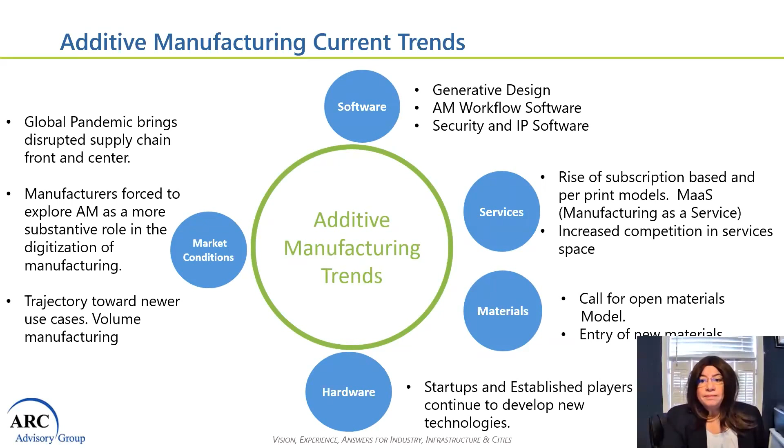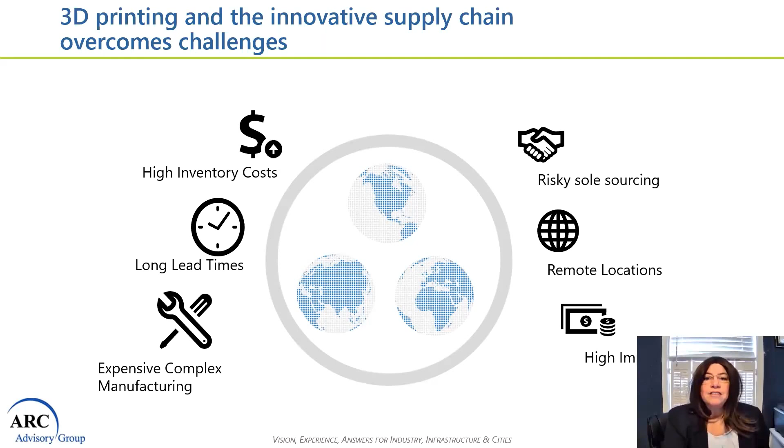Let's take a look at the supply chain. As I mentioned, the pandemic has brought risky supply chains front and center. Supply chains are fragile due to the political turmoil, climate events, pandemics, economic uncertainty. Additive manufacturing mitigates supply chain risk with a design anywhere, produce locally strategy. Additive manufacturing can alleviate expensive, complex manufacturing, shorten lead times, and reduce inventory. Producing locally mitigates the high import-export costs and risky sole sourcing from remote locations. Additive manufacturing can rescue the supply chain.

Software advances are instrumental in the process. Generative design is an iterative process that generates multiple design outputs, meeting predefined constraints and requirements for fit, form, and function. Engineers are using generative design software, such as those provided by PLM solution providers, to design for AM, exploring hundreds, if not thousands, of solutions to be evaluated within a relatively short time frame. This is enabling manufacturers to produce products that could not have been engineered a few decades ago.

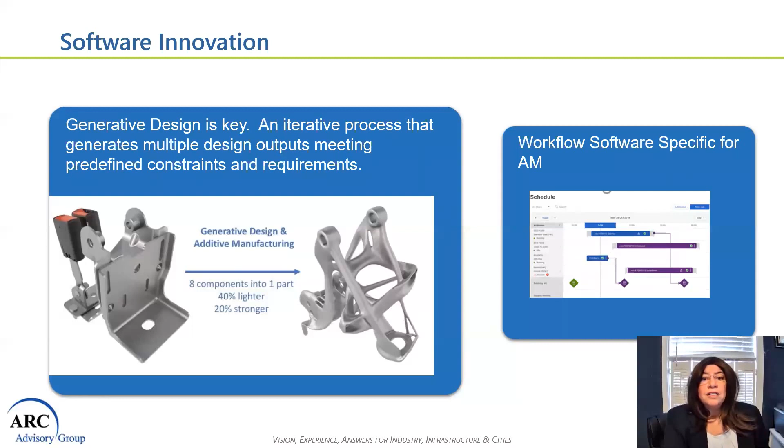An automated workflow software specific for additive manufacturing will become increasingly important as we move to serial production. This will help companies manage increasing volumes and scale additive manufacturing operations, monitoring production costs, material usage, and order turnaround times.

Now let's talk about services and materials. As with other transformative technologies, adopters are balancing short-term investments for capital expenditures versus much-needed innovation in a competitive world. A rise in subscription-based and pay-per-print models is being observed as a result of discretionary spending restrictions and budget limits for capital expenditures. Outsourced production services provide a way to leverage some of the benefits of additive manufacturing, particularly for companies that have put their short-term investments on hold.

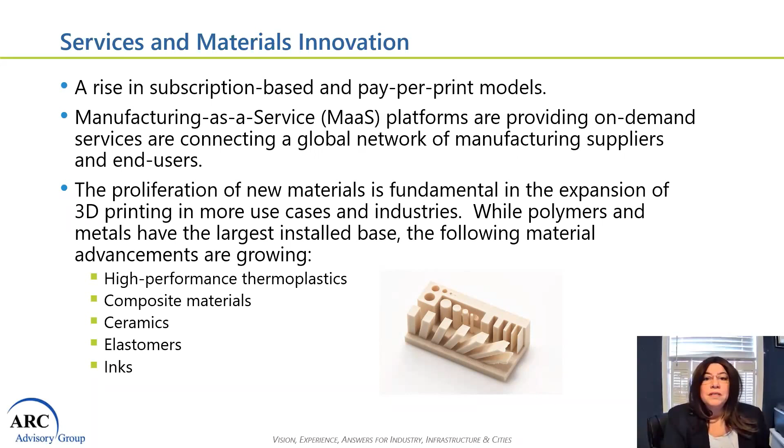Manufacturing as a service platforms provide on-demand manufacturing services connecting a global network of manufacturing suppliers to end users. These platforms offer not only additive manufacturing services, but also traditional manufacturing services. And the proliferation of new materials is fundamental in the expansion of 3D printing in more use cases and industries. While polymers and metals have the largest installed base, the following material advancements are growing: high-performance thermoplastics, composites, ceramics, elastomers, inks. This is resulting in an even more diverse set of products being designed and produced by 3D printing.

Now I'd like to talk about the proliferation of use cases beyond prototyping. Use cases are defined by the value they create, including new products, operational efficiencies, and enhanced customer services. Additive manufacturing use cases beyond prototyping include but are not limited to parts for new products, parts for aftermarket, such as out in the field when parts fail, jigs, fixtures, molds, and tools to be used on the manufacturing line, and also apparel.

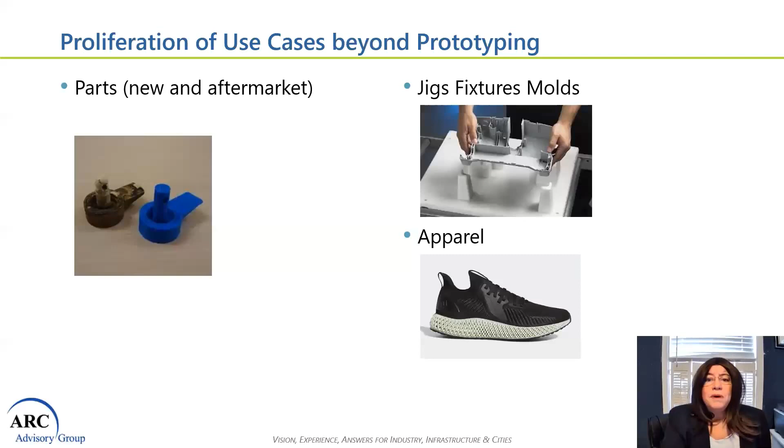Additionally, medical devices and models are not new. 3D printed prosthetics, hearing aids, splints are applications that have been around for a while in additive manufacturing. But implants that are appearing inside the body are becoming more prevalent. This is thanks to the materials science and our discussion earlier about generative design. And 3D printing is part of digital dentistry, including orthodontics, implants, crowns, dentures, to name a few.

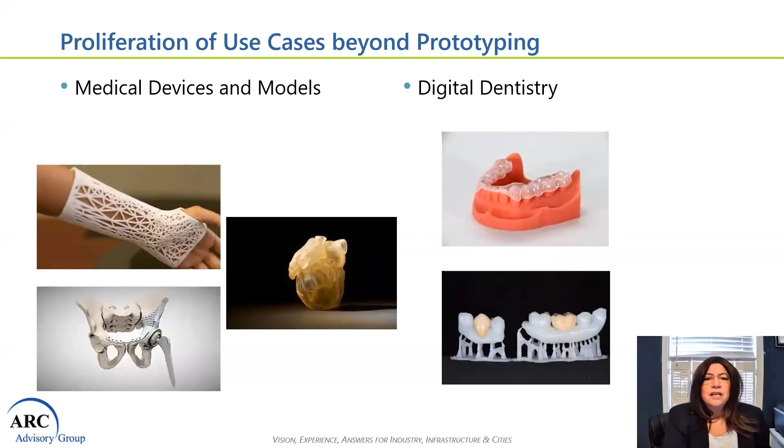I'd like to wrap up with some of the growth contributors and inhibitors, some of which we've already covered. On the contributors side, companies engaged in digital transformation and the smart factory adopt technologies such as 3D printing, leading to reinvention of products from design through manufacturing as part of an end-to-end solution. The rise of new technologies and suppliers have furthered the capabilities of 3D printing, including increased speed and build size.

On the inhibitors side, we still have a long way to go, all of us, in educating the marketplace to reverse the obsolete opinions. Not all companies are as forward-looking as the ones that understand that additive manufacturing is more than just prototyping. It can reduce time from idea to production, can result in cost reductions, and can be environmentally friendly. Many decision makers have decades-old mindsets about 3D printing, thinking it is still an expensive, slow tool simply for prototyping. And the standards discussion has been around for a long time.

Lack of comprehensive standards brings an additional risk to companies adopting 3D printing manufacturing, especially safety-critical applications, and those that are heavily regulated. True industrialization would benefit from process, materials and post-production standards. And this ties in with quality assurance. Even though the quality of 3D printing is steadily improving, there are still advances to be made in part-to-part variation and material chemistry. And finally, we don't just live in uncertain times, but we are living through unprecedented times.

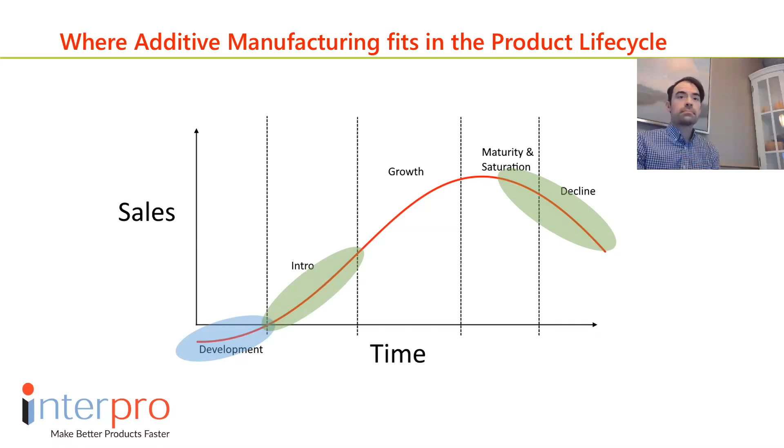One of the things I think about is I had a relative who used to work at Pratt & Whitney, the aircraft and engine manufacturer, in the 50s. He had a Bridgeport in front of him and a manual lathe behind him, and he would make a part complete, but he would make the same part again and again.

Nowadays, a lot of modern day machine shops, you may have 3 to 4 machines to one person, one machine operator.

I think the market has become so much more complex, partly because we have more data to get feedback from clients and to see what they actually want. There's no one coffee maker that is the coffee maker. There's coffee makers for people that really like coffee and the artisanal experience, and then there's a generic percolator. There's all these different products that kind of address different consumers.

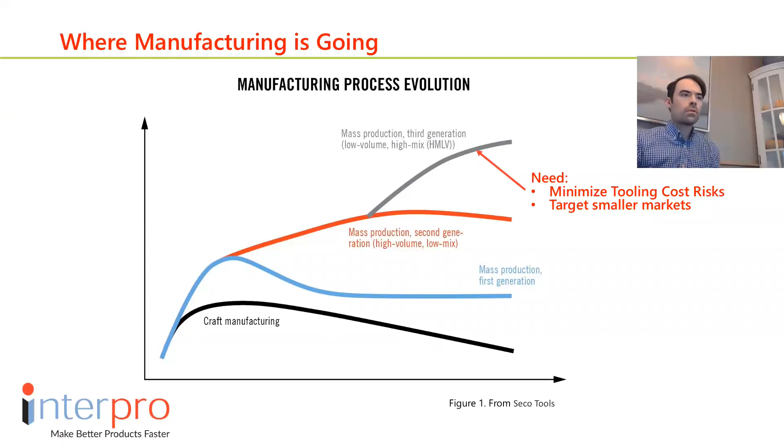But with new machines and materials for the Origin One printer, you really see a different conversation starting to happen, at least I'm able to have them.

So whereas, yeah, it'll be expensive for like one part due to some of the setup time and calculations that we do, the exciting thing is where a lot of 3D printing parts, I think, would start to get too expensive once you get up to the 50, 100. We're able to sell parts almost at, not quite injection mold prices, but getting close, when we're getting up to the thousands, which I haven't had the ability to do in the past without losing money or artificially reducing my margins.

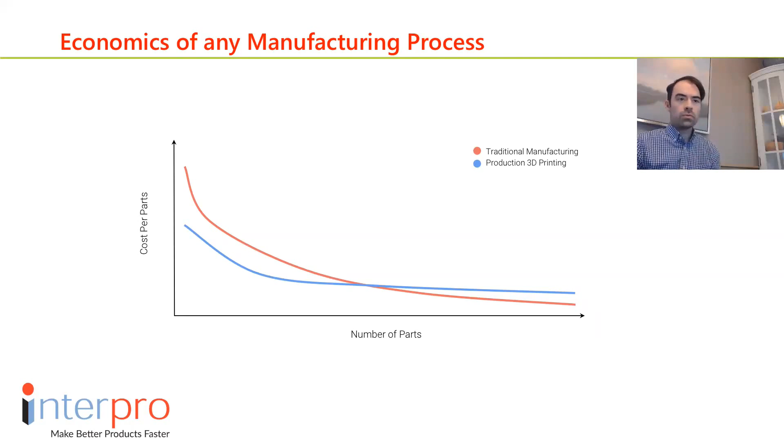The Origin printer naturally can produce parts very fast, whether it's one part or 50 on the build. The build time ends up being the same. So it's a pretty powerful tool from that perspective. And for a couple other reasons in terms of quality and material properties, which I'll get into, it's very helpful.

Now that I've talked about the product life cycle and some of the economy of scale we see with 3D printing, I want to talk about the process and the printer specifically and why that adds a lot of value to that conversation. I think additive manufacturing for production parts has been around for years.

A lot of people have been talking about it, and I definitely agree it does exist. I think printers and the ecosystem that the Origin represents will allow more products to exist in that conversation. Maybe in another year or so, I think we'll be doing products that are only ever 3D printed off this printer, which is very exciting.

From an ecosystem standpoint, the materials really enable us to do quite a lot more than we have traditionally. For example, the Loctite Henkel materials come in elastomers, silicone elastomers, high impact, high flex parts, different colors, but also we just started running the FST material, which is rated by Airbus for aerospace applications and burn ratings. So that's very exciting. As a service bureau, every new material is basically a new problem that we can solve for someone.

The first application I want to talk about is this Distek motor mount adapter. I like talking about it because it's one of the first ones we did, and I still think it's one of the best, because it encompassed the vision I had for the Origin system and what it was capable of doing.

The situation was that Distek had a motor mount adapter. They sell this BIOne mixing unit, and it's got a motor that gets mounted to the top and spins everything. What they were finding was that their clients often had their own motors, so they didn't want to purchase Distek's motors. They didn't want this high ticket item, their core product, the sales to be impacted or impeded by this issue with clients wanting to use their own. So they came up with this adapter, which allowed people to use their motor or any other motor.

As you can see, the way this component was designed, you wouldn't be able to manufacture that traditionally, not very easily. You wouldn't be able to machine that. You certainly wouldn't injection mold it. Even a hand process like cast urethane would probably struggle to produce as nice of a part.

For this part, the Origin did extremely well. We built it in the Loctite 3843 material, which is a matte black, and you can see from the surfaces it's a nice, appealing, customer-facing part. It looks production ready.

The way Distek benefited from that, and as well as their clients, is that they were able to print the SKU for their core part as they needed them—almost like that digital warehousing experience. So they wouldn't have a lot of stuff on the shelf, but they could also have a lot of different SKU numbers for all the other motors out there. As clients would come in and say they had their motors, we would just 3D print them as needed. I think it's a great story because it was a business facilitator—it wasn't necessarily about driving price point down, but it decreased risk because they were able to address client concerns in real time and not impede their core product sales.

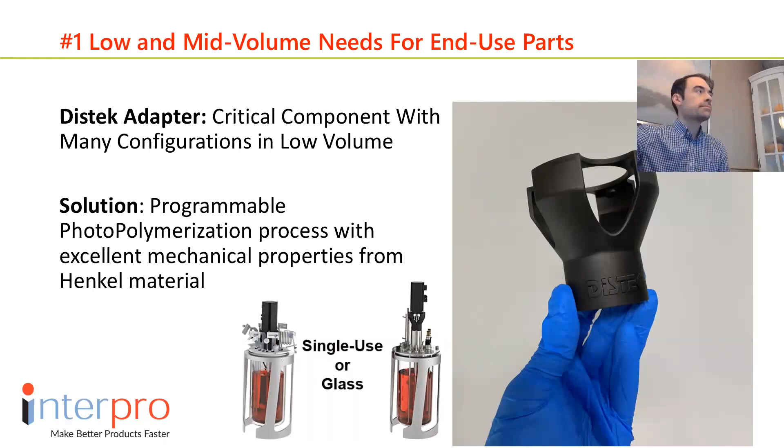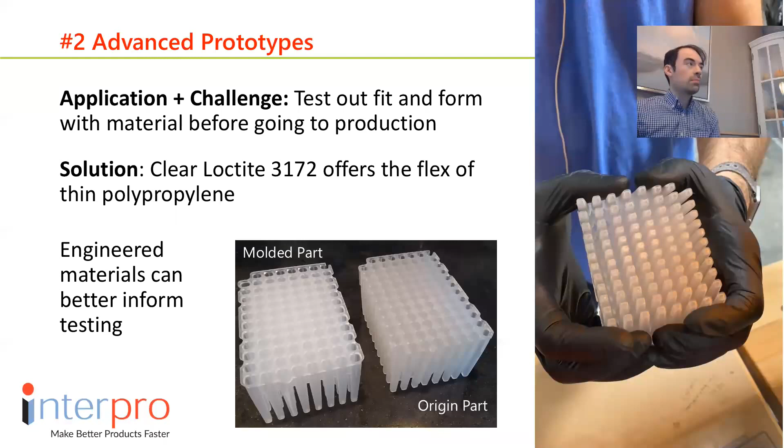You can definitely CNC it—there are some compromises with radii you'd have to make—but for the count they were looking for, maybe 200 to 300, it really worked out well. It's fairly expensive, and to machine that part out of an HDPE or PolyPro is again not ideal. You could injection mold it if you cored some parts out, but a tool cost of $5,000, maybe $8,000, is just way too expensive for the part price they needed.

So printing on the Origin worked out really well. We're able to print 18 parts every 2 hours, and that process is really fast. It's all about how many more parts we can stick on that tray—the better the per-part price is, because it's 2 hours whether it's one part or 18. So the only additional costs are really the processing and material considerations.

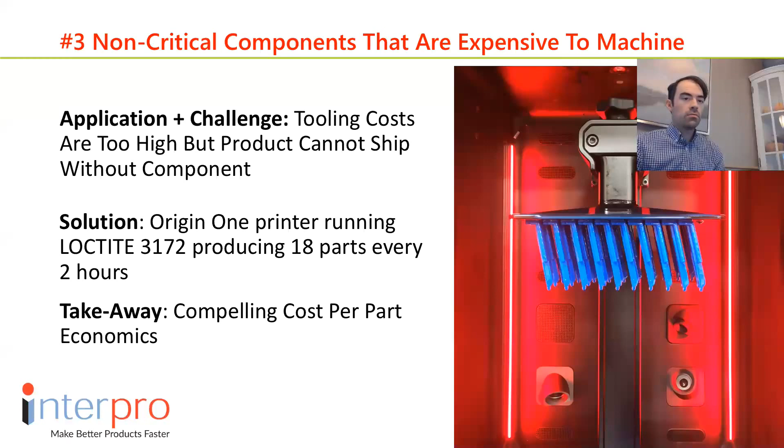Okay, that's the last application. So looking forward, the future is still bespoke, and it's an exciting time. It's not going to be one-off Italian suits, but I do see these kind of niche markets appearing and being addressed, with companies taking advantage of new tool sets like additive manufacturing. We're seeing a lot of just-in-time manufacturing, like with the ventilators.

We're seeing better materials out of Loctite, these engineered materials that act more like traditional commodity plastics. The Origin One allows for faster print time, which reduces risk by dropping the cost per part. It's been fulfilling for me that in 2021, the leap that I took and InterPRO took to offer these production parts off these printers did work out. The best vote of confidence was clients just sending a PO to reorder more. That means we're on the right track, and it's not a pipe dream, which is very exciting. It's nice because I believe we're actually fulfilling a need, and it's no longer just a dream.

So production 3D printing is here and offers a competitive advantage to our clients over traditional methods. Anyway, my name is Dan Straka from InterPRO, and thanks for watching this.

Thank you, Dan. Yes, you are on the right track. What I really liked about your presentation was looking at the manufacturing process evolution and the intersection of hardware and materials, and then bringing it into the application. So I thank you for that.

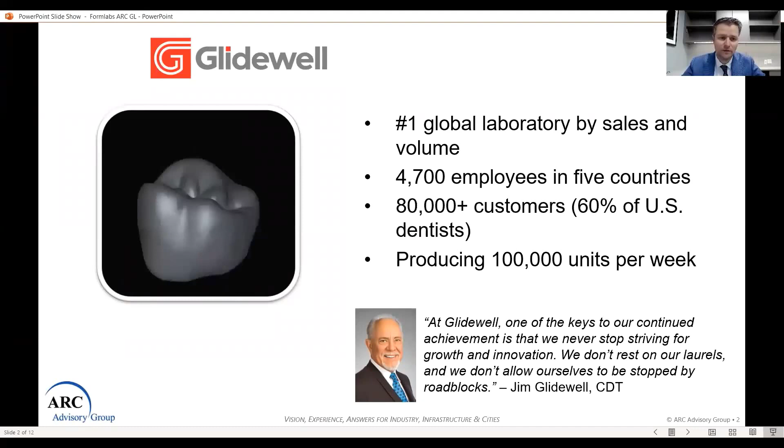We also produce 100,000 units per week, and every one of those is a patient-specific product, which represents an enormous array of natural variation. We've been using additive manufacturing for many years to deliver on those patient-specific demands. To give you more context, we consume 15 metric tons of resin per year, or in anyone's terms, an awful lot of teeth.

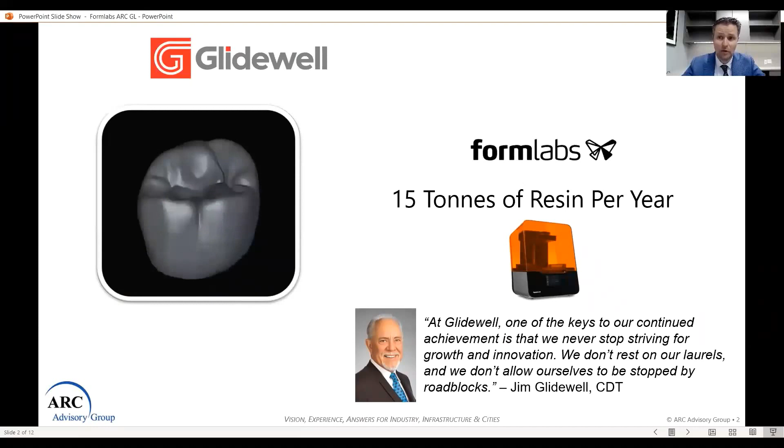So I'd like to take you back to March of 2020. Surprisingly, January and February of that year had seen an unexpected uptick in sales, we believe due to a lot of our competitors using offshore manufacturing that had been more disrupted than our own.

But on March 16th of that year, the ADA began to recommend that dentists postpone elective procedures, and we saw a dramatic drop in sales.

So we began to be pretty concerned about the business consequences of this, apart from everything else we had to worry about. We were questioning how do we keep serving our customers and their patients during this time? How do we keep our workforce safe and productive? And will dentists have sufficient access to PPE to perform essential procedures? We naturally expected that to be quite down the list of priorities, and we weren't really sure what kind of impact that would have.

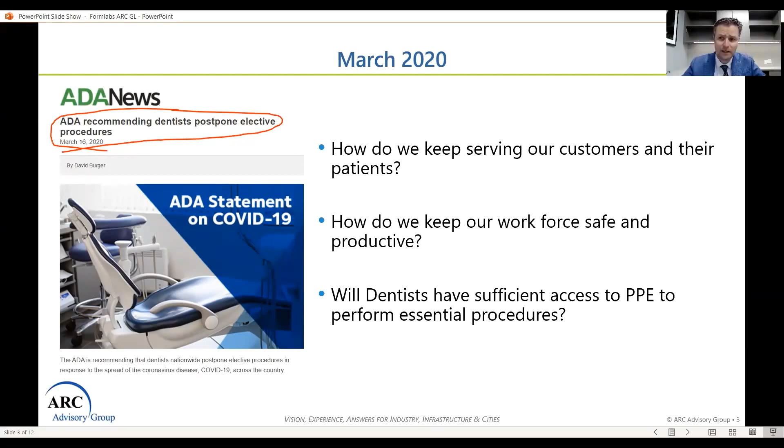So at this point, I need to provide a little bit of technological context. If we look back to 1970, you can see a picture of Jim Glidewell himself, our founder and CEO, working in his apartment. The technology we used to produce dental products at that time really hadn't changed for 100 years. It was very manual, a kind of artisan-based craft, and it took a lot of work to do so.

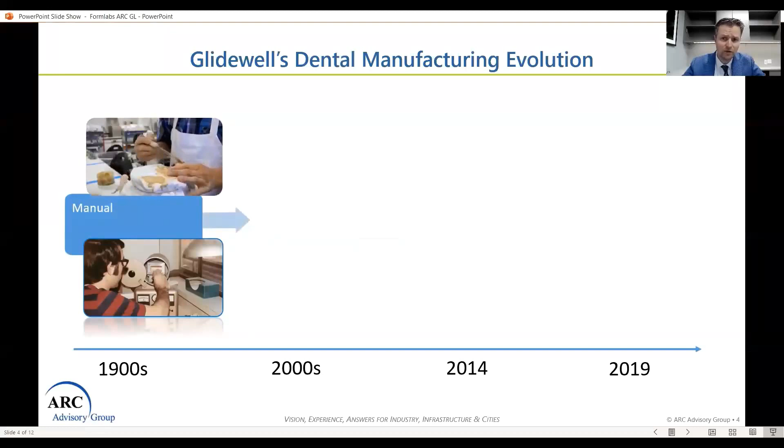If we fast forward to the 2000s with the CAD/CAM revolution in dentistry, we start to see the use of additive manufacturing, CNC machining, and CAD/CAM technologies. Fast forwarding to 2014, that's when we began to use cloud-connected infrastructure, and we began to implement what I call islands of automation, which were mostly machine tending applications. And in 2019, we made big strides towards building these full digital large-scale factories.

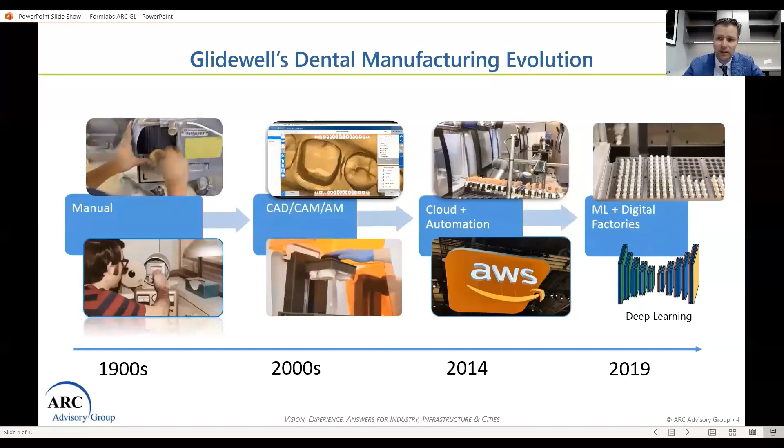We applied a lot of machine learning to those systems. Notably, in the application of generative design, I believe we're the first company to apply a technique called GANs to generatively create 3D data that we use to manufacture our dental products.

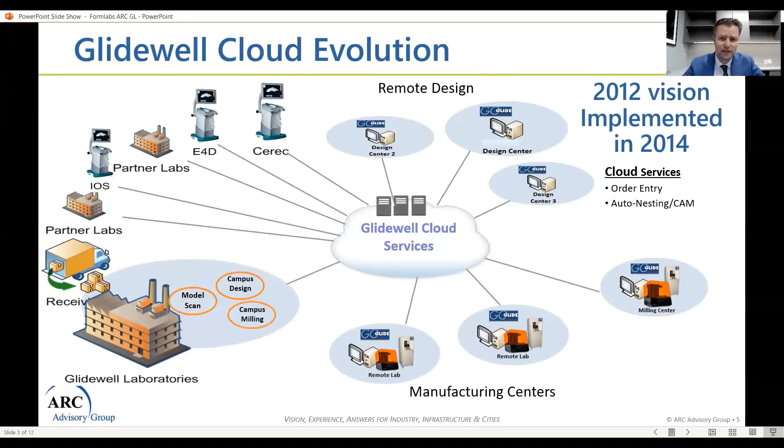You can see the animations showing lots of locally hosted components, the software that will move to the cloud, and the various different modes of operation across our distributed manufacturing network, which has a lot of local sites spread across the US and internationally. This just shows the resilience of those systems being able to acquire a scan in any location, design it in any other location, and then manufacture it at still another location.

One of the visions of this was having a very tolerant disaster recovery system in place, but we never envisaged anything like a pandemic. Our thinking was mostly driven by being a California-based company, the threat of earthquakes, and having to move a lot of our manufacturing away from our large facilities here in California to put more load on our distributed network.

But as fortune would have it, those same qualities that would protect us in those circumstances lend themselves rather well to the pandemic. If we think about it, having a cloud-based design system and routing engine to move digital data through our system and redirect that manufacturing flow lends itself very well to moving design workers, allowing them to work from home if we need to. It just provides dramatic flexibility in terms of whatever local forces are at play.

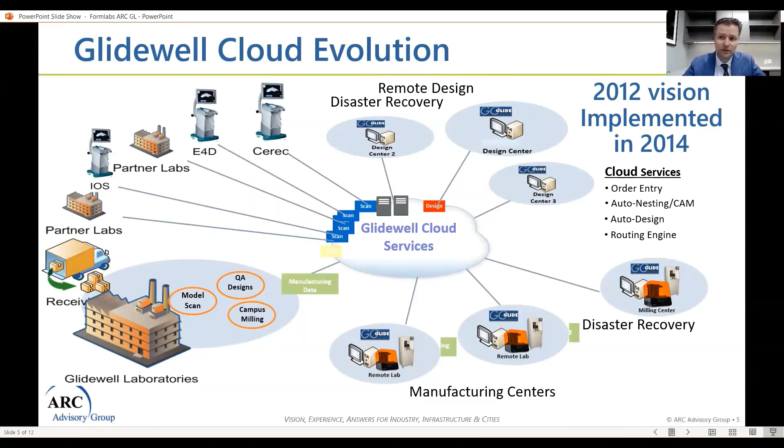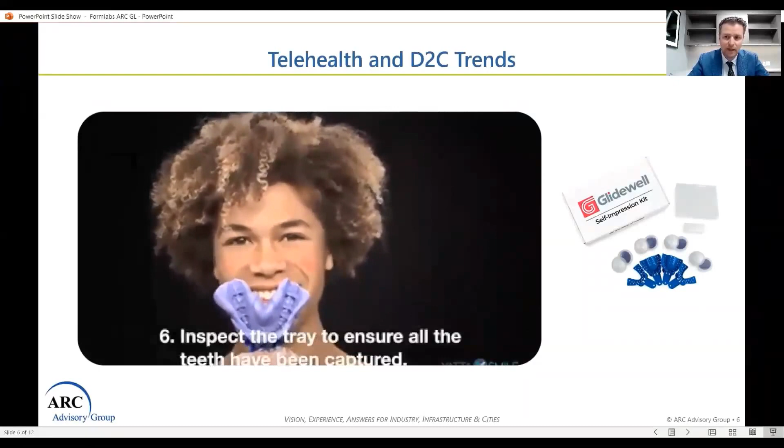Another dimension of helping our customers better serve their patients safely: we developed some approaches to telehealth along similar lines to large direct-to-consumer orthodontic companies such as Smile Direct Club. We provided a self-impression kit that the dentist could then provide to their patient, and along with some guidance and instruction from the clinician, successfully capture the dentition geometry that we could then digitize.

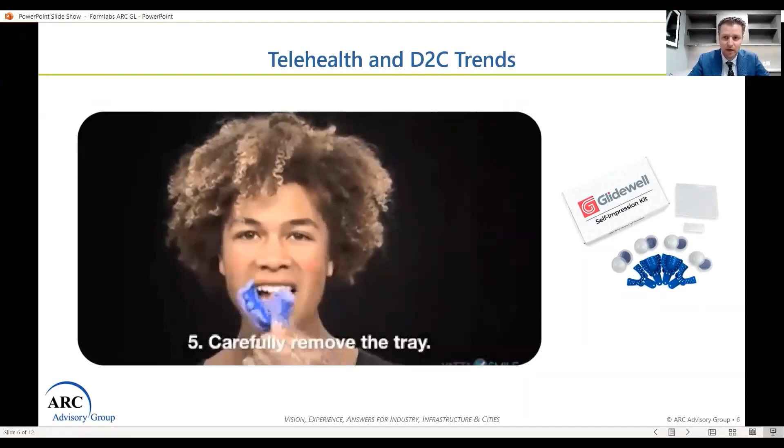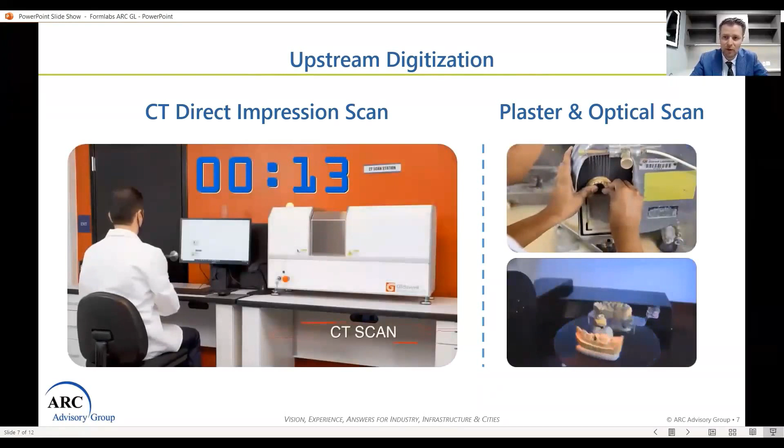So rapidly handling all of those physical impressions poses a little bit of a challenge for our nice distributed cloud-enabled manufacturing infrastructure, as we have to rely on 100-year-old manufacturing techniques around the plaster model here that you can see. And it's a very laborious process and requires a significant footprint of facility and a lot of labor to do so. It's only after we have that plaster model poured that we can then digitize it, as you can see on the lower right.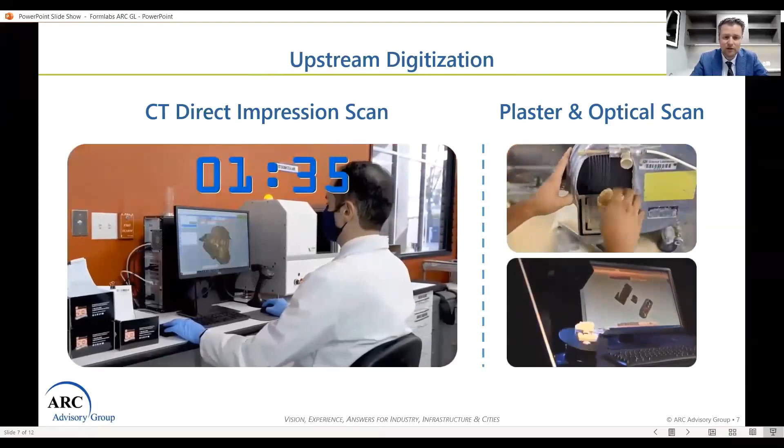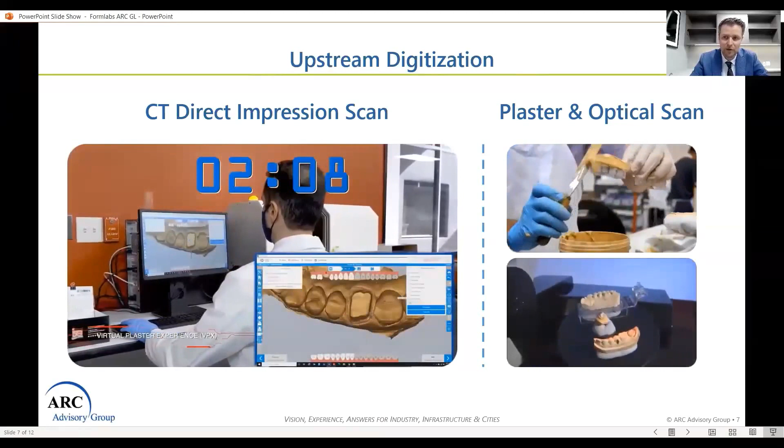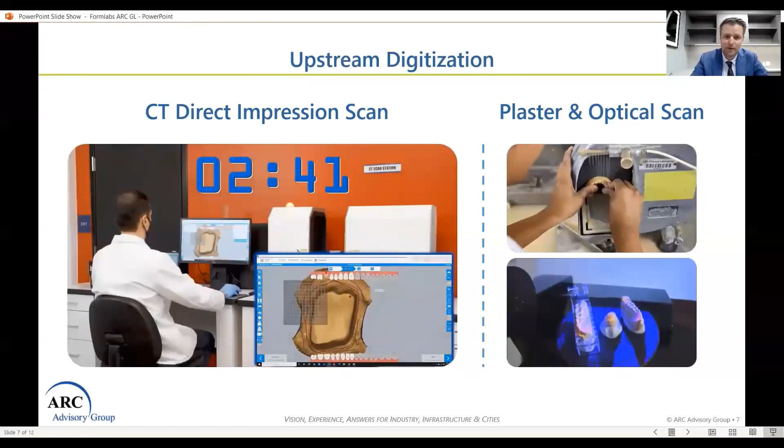An alternative approach that was developed to address this is using CT scanning to digitize the impression directly. Impressions have lots of line of sight issues, a very complicated geometry that any kind of triangulation approach to optical scanning is rather problematic for. CT can handle impressions very rapidly and very accurately, and that really enables us to digitize as far upstream as possible, which is always a core principle for us.

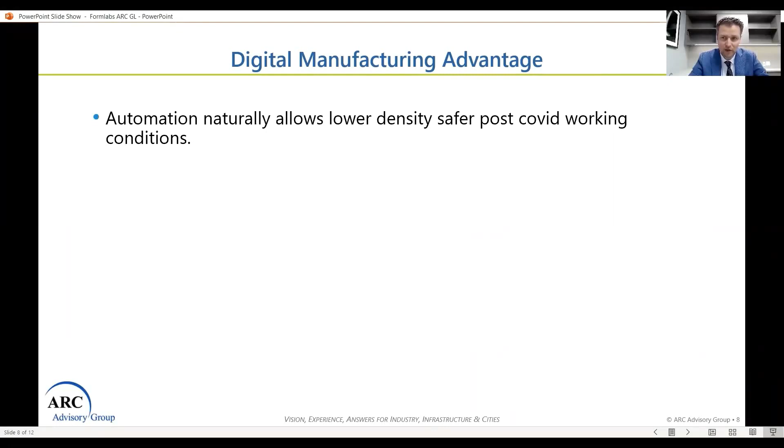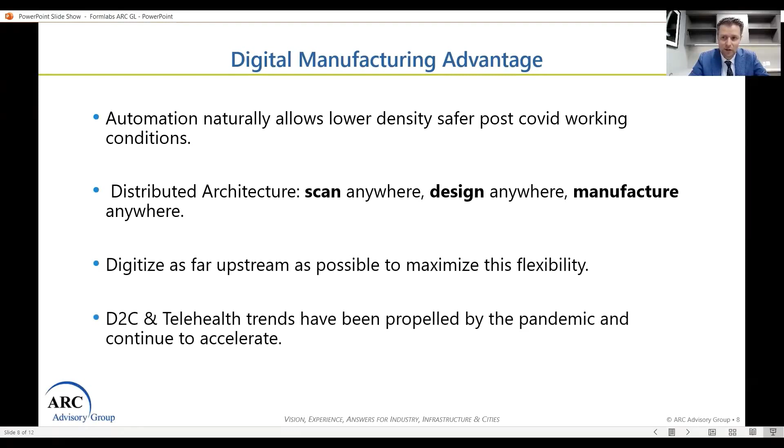So to summarize a few of those points, the automation that we've invested in naturally allows lower density, safe post-COVID working conditions versus a conventional lab. The distributed architecture that we have in our manufacturing system allows that flexibility to deal with any kind of local conditions and issues. And by digitizing as far upstream as possible, we get to maximize those benefits. I'd also add that direct-to-consumer healthcare and telehealthcare is a big trend in our industry, and additive manufacturing, I think, is a natural partner to it, along with these other digital technologies.

So let's get back to talking about that PPE shortage we referenced earlier on. So in March of last year, there were a lot of 3D printed respirator designs circulating out there, none of which were very comfortable, scalable, sealed, and certainly didn't have any analysis or testing behind them. So we needed something of a higher grade to provide to our customers.

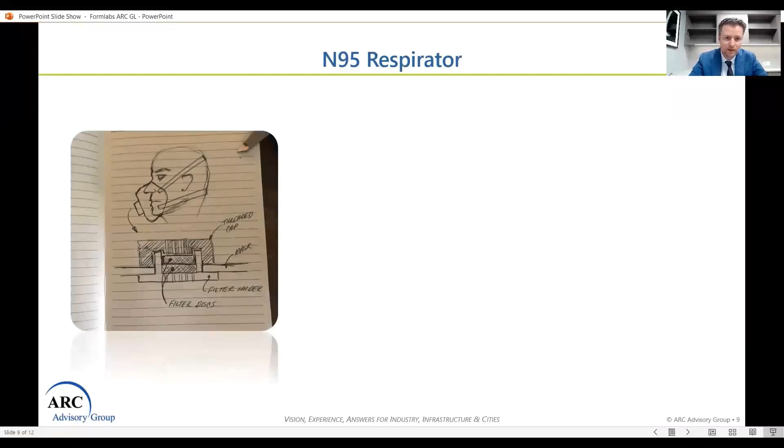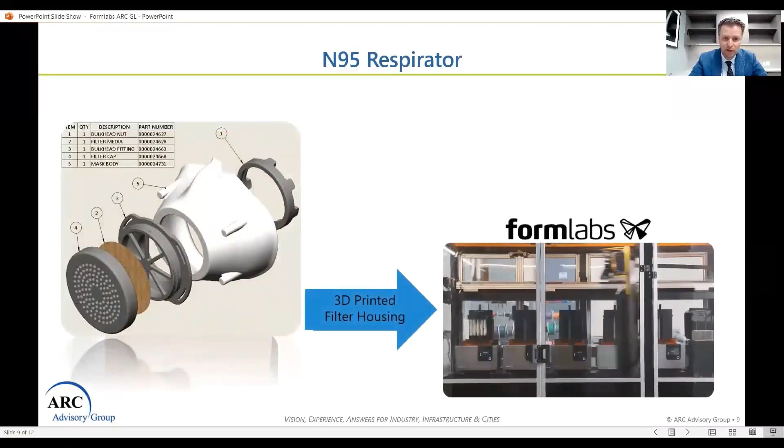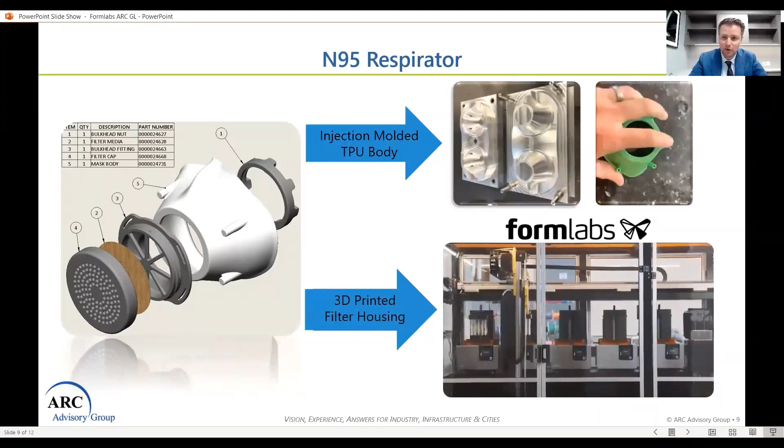So early one Saturday morning, this text image of a concept arrived in my phone, and the concept was simple, a reusable, replaceable filter design, and it would leverage our form cells to do high volume printing of the filter housing, and we would use our in-house injection molding to make a TPU body that's nice and flexible and comfortable and is a medical grade material.

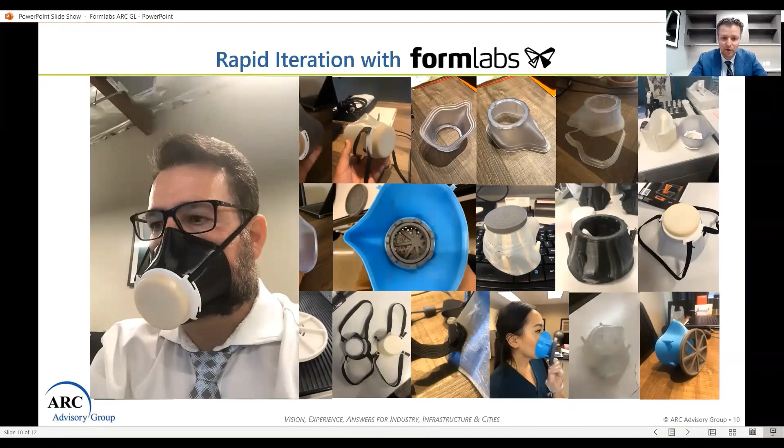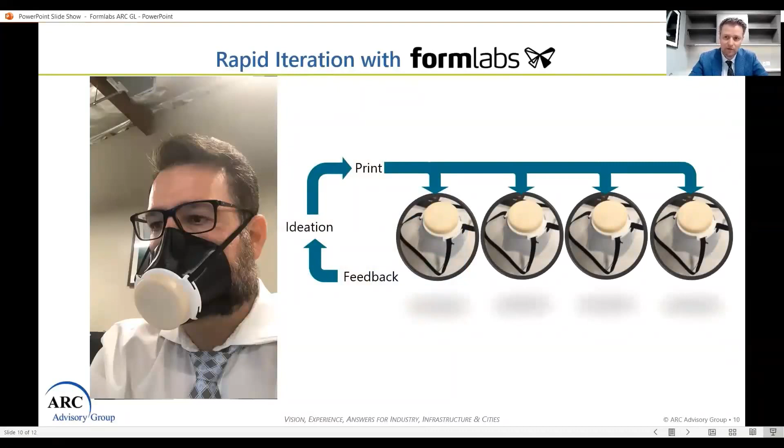Now, we also used the formcells to really be aggressive about our design iteration process. And I just want to show you a quick picture here of the gentleman who actually sent me that text that day, James Samora, who's the lead on the project. And we went beyond that kind of normal ideation, prototype, testing and feedback loop. And using the capacity of the system, we really pushed out and did multiple designs and tested them in parallel. I think that was key to how quickly we were able to complete the project.

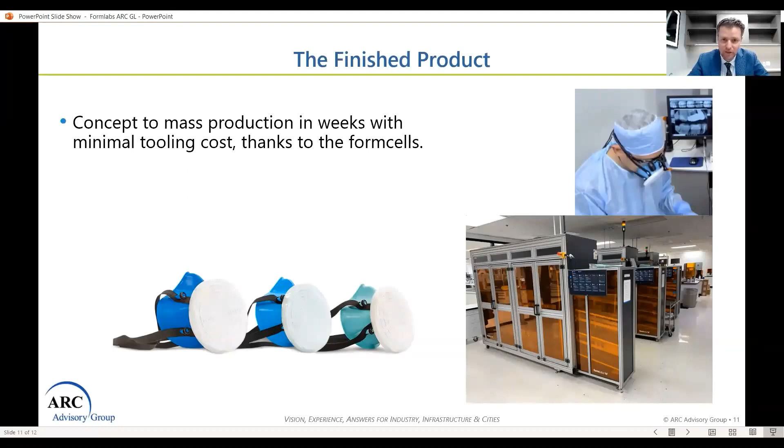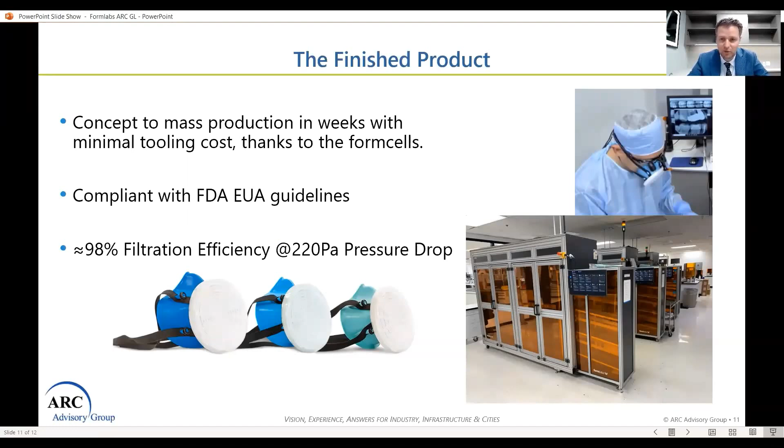So we were very happy with the outcome of this project. We got many thousands of these out to our dentist customers right when they needed them most. We went from concept to mass production in just a few weeks with minimal tooling costs thanks to the formcells, and followed the FDA EUA guidelines along the way, and achieved a 98% filtration efficiency at a 220 Pascal pressure drop. And the take-home message for me out of this project was, don't believe your own hype.

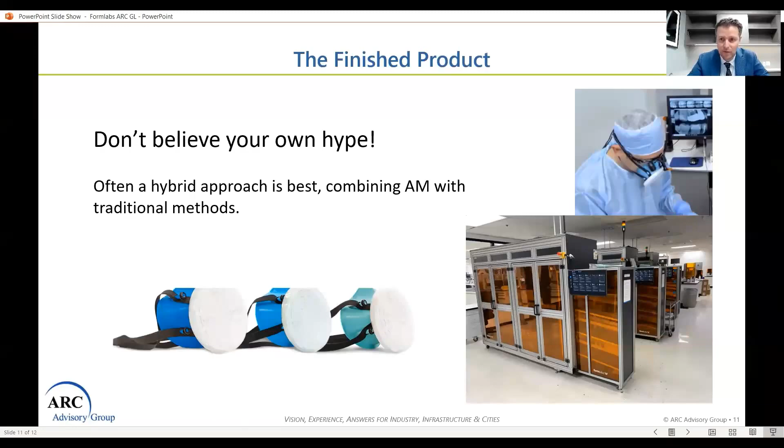You've got to be realistic about the limitations of additive manufacturing techniques that you have available to you. And even when you're under this kind of extreme time pressure, a hybrid approach using conventional tooling can often win the day. So there's a couple of recurring themes here. Digital workflows are naturally agile. We may not know what the future has in store for us, but that agility can give us the best chance of responding to the environment. We have to keep innovating. The technological investments that we made during the good times help carry us through the bad, and I feel that's a significant component of the successful recovery that we made.